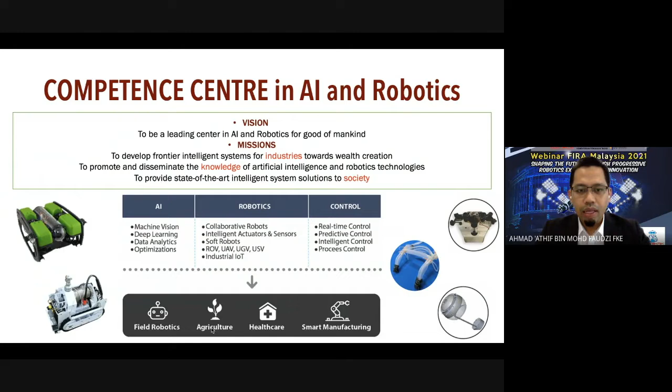My personal research area - we have a few members with different areas - I'm involved in bio-inspired robots, where we develop robots that mimic God-created creatures like ourselves and animals. I'm also involved in field robotics, which covers 3D jobs: dirty, demeaning, and dangerous work. The third area is rehabilitation robotics or biomedical related solutions. The fourth area is biodiversity.

In project areas 1 and 3, we mainly use soft-based actuators or soft robotics, which I will also explain later. This blue box highlights the fundamental aspects, and some of the students involved in masters or PhD are working in this particular area.

To start with, we Malaysians have our goal towards the Shared Prosperity Vision 2030. Within this vision there are 3 main shared prosperity points: equitable growth, sustainability, and inclusiveness. These 3 points are very important to bring Malaysian society towards becoming a high-tech nation.

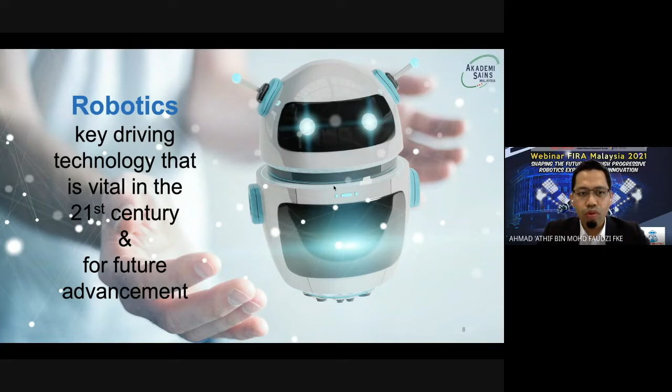So we see that robotics is going to be part of the key driving technology in the 21st century and also in the future of advancement. The IFR, International Federation of Robotics, have divided robotics into two main categories: the first is service robots, and the second is industry robots. Within service robots, there are another two areas: domestic and professional.

And the total of this sales is close to 48 billion USD dollars. So it is going to increase.

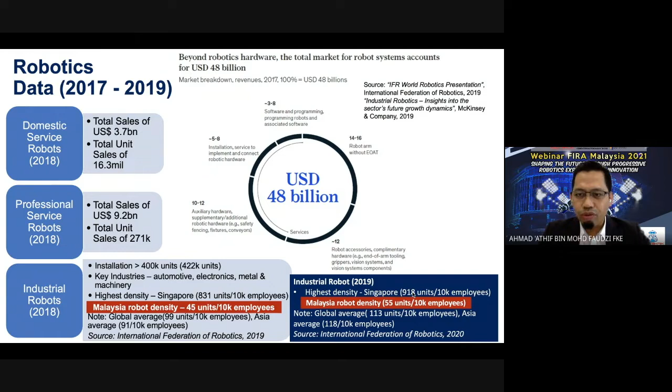However, if you want to look at how Malaysia compares with other countries, the Malaysia robot density is quite lower compared to our neighboring country. We have around 45 units per 10K employees in 2018, and they have around 800. The increment in one year is quite big compared to us. We have increased by 10 units. However, for Singapore, they have increased by nearly 100 units. So we can see also the latest data later on 2021.

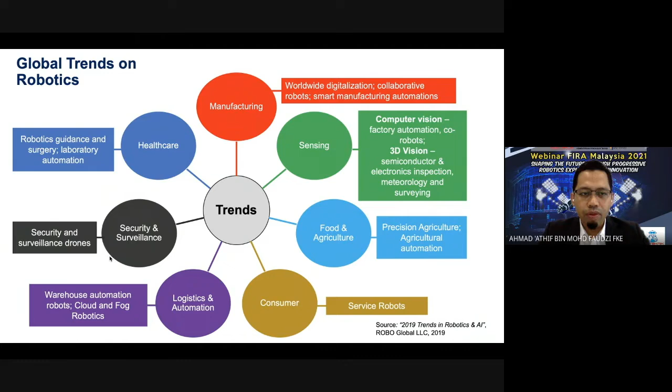So the global trends on robotics, if you want to talk about applied areas, it falls under many categories. We can see healthcare, manufacturing, food agriculture, sensors, mostly in smart manufacturing as well. Security and surveillance, we are doing some of the work here. And we also have robotics in logistics and automation.

We see that most of the advanced countries have their own robotic roadmap, or maybe the country vision. In Malaysia, we are still not having our own roadmap. That's why we're trying to see how the available statistics, especially on the automation readiness index, although we are at rank 14, can help us be at par with other countries, especially to assist startups and also the development of new technology, because robotics is still quite new in Malaysia in terms of how we can come up with our own solution, because normally we take it either from China or maybe use some of the industrial robots from Germany.

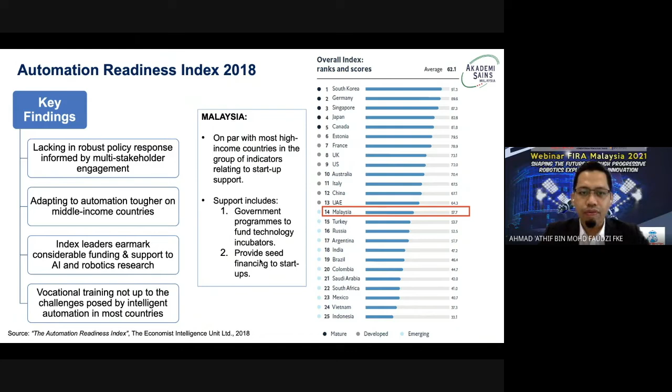So this should include support from government to assist programs, especially for funding some of the technologies. We can see also some of the support that we want in terms of providing assistance at our tertiary level, university, polytechnic, and also to provide seed financing to the startups.

As I have highlighted earlier, in Malaysia we are still yet to have our robotic policy, and that is where the discussion under Academy of Sciences Malaysia, together with some of the robotic experts, comes in to come up with our national robotic roadmap. Actually, we are at the final stage of compiling all the data, and hopefully we can use this data and the policy to assist our talents, especially in the robotics area, to perform towards the progress of our country in this area, robotics.

So we put 6 points under the National Robotic Roadmap, and talent, research and development, commercialization and innovation are among the main parts of the robotic roadmap itself.

So I would like to share some of the contents of the robotics journey in Malaysia. Roughly, we started back in the 1990s, with two universities, UTM and IIUM. UTM started a little bit earlier than IIUM, but roughly in the same year. And we have CAIRO as one of the earliest centers, in 1997. So roughly now we are more than 20 years into providing solutions in AI and robotics. Now we have a lot more solutions and also companies coming in to assist in this area.

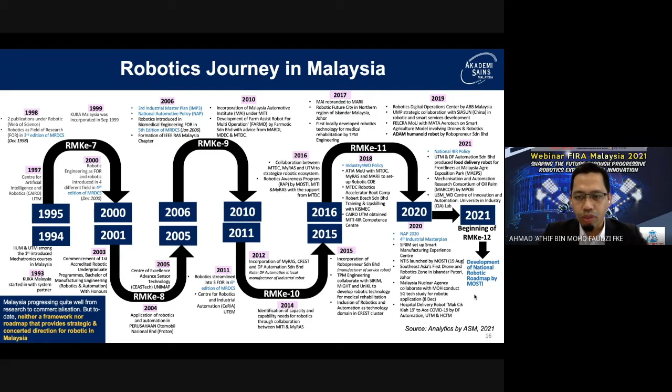Here in 2021, we are working together on the National Robotic Roadmap, mostly at the moment with the assistance of ASM. So for today's session, I will be sharing some of the technology that we have in CAIRO, as well as introducing some of the work that could be useful as part of the awareness in this program.

To start with, we want to highlight again what was mentioned by IFR, International Federation of Robotics, where we have two main categories: industrial robot and service robot. They may have 3 degrees of freedom or more to assist in fabrication, manufacturing, and so on. Whereas in service robot, anything excluding industrial automation is considered a service robot.

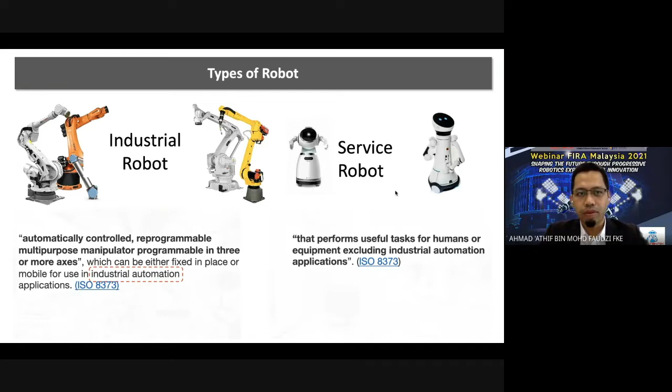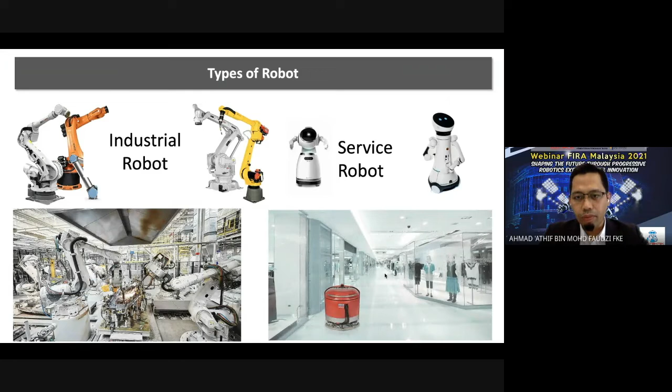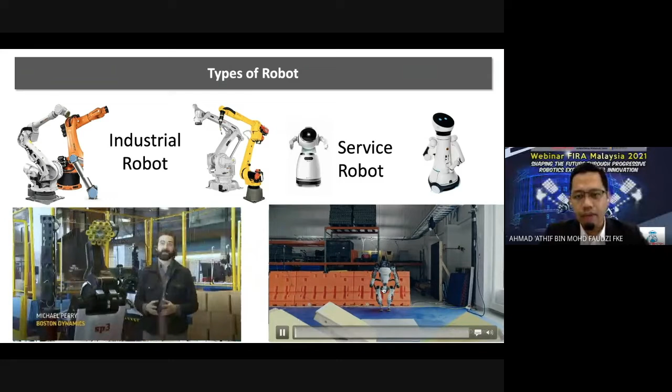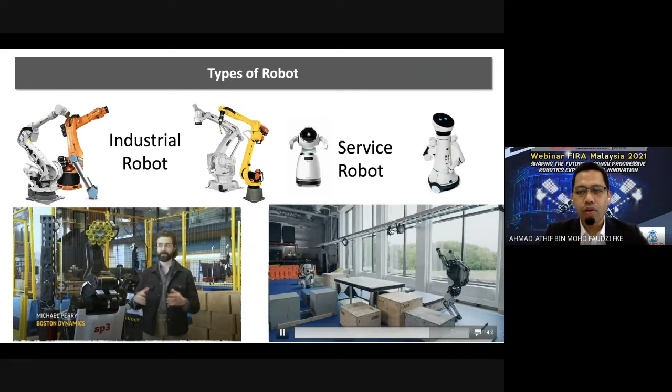And we have this Atlas robot that can move around and also do jumping. I think the most important part for this Atlas robot is the motion, and how it jumps. Here is one of the most interesting parts where the robot itself can do a backflip. Even I cannot do a backflip like this. So this involves a lot of control algorithms and so on.

We can see that initially most roboticists learn how to develop robots inspired by creatures Allah SWT created: animals, humans, leaves, trees. Based on these available structures, we try to imitate and learn how those kinds of movement can be used in some of our applications. So we have snake-like robots for surveillance, and vacuum cleaners using crab motion and so on.

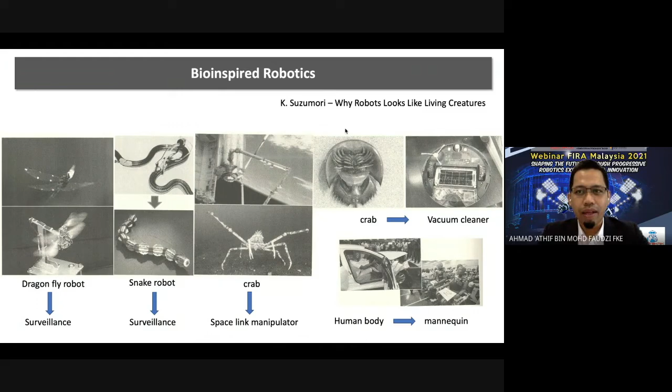Kei Suzumori is my sensei, and he wrote a book on why robots look like living creatures. So eventually, yes, we are learning from living creatures — that was part of the inspiration in robotics.

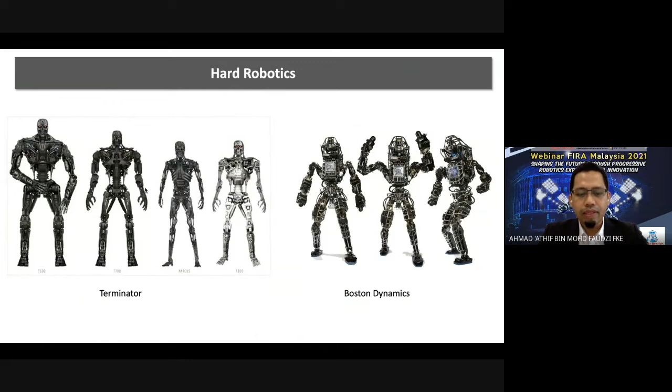And we have the category of hard robotics, which uses metal structures like this. As I've shown you earlier with the Boston Dynamics development, we can see that this hard robot has rigid material, higher precision, and higher speed.

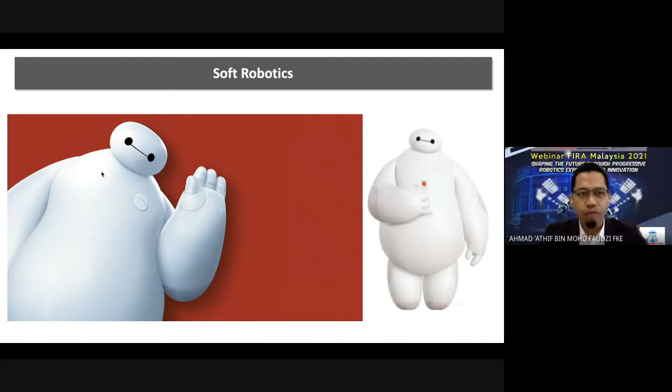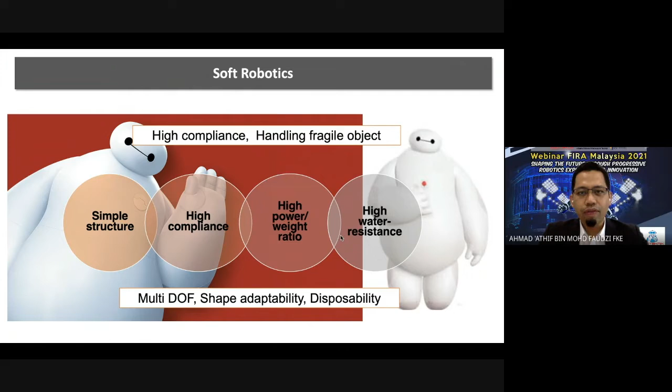Whereas for soft robots — I think most of you may be quite new to soft robots — we have this example of Baymax from the Big Hero 6 movie, and the structure is quite different from the previous hard robot. It's simpler, more compliant with humans, and has higher water resistance. This is part of the advantage of soft robotics, and this kind of technology can also be used in certain areas, for example in healthcare.

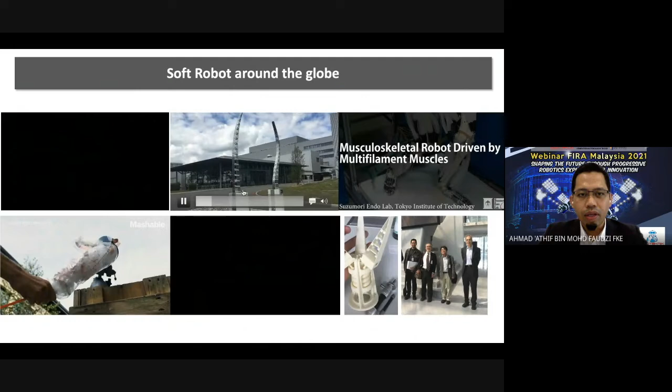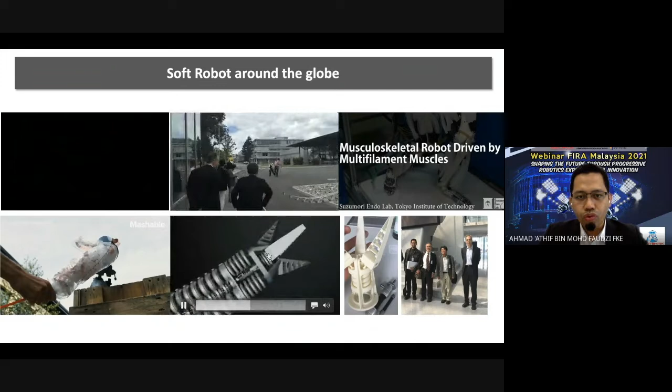I would like to show some examples of soft robots around the globe. One company, Festo, developed this elephant trunk robotic arm, and the technology they use is air-based, pneumatic-based source to do manipulation. The gripper here is the actual gripper.

This is me when I had the experience to visit them in Germany. We could feel the material — they use additive manufacturing. And uniquely, they also use the same method to develop their own gate at Festo.

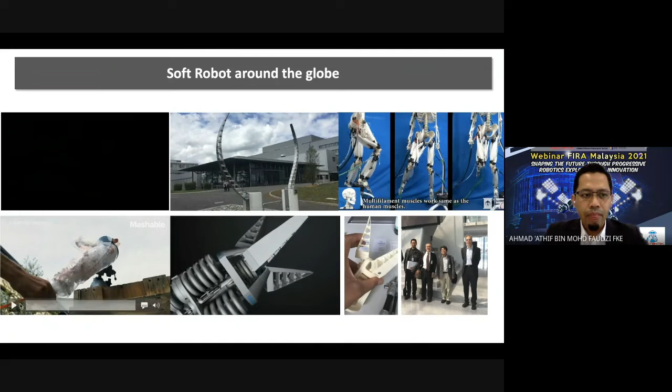Other than Festo, some of our researchers — this is from Japan, my sensei — are developing robots using pneumatic artificial muscles. Some development uses balloon-type actuators, and some others are working with chemicals. So these are examples of soft robots around the globe.

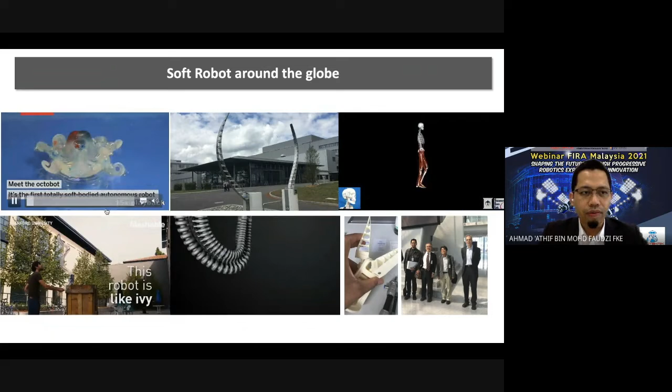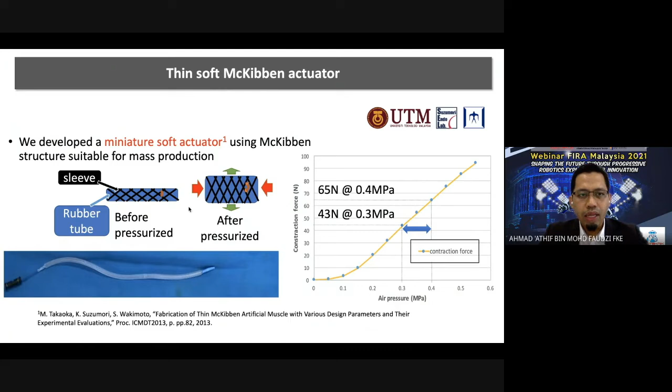One of the things we do in our lab is partly collaborate with a Japanese collaborator from Tokyo Institute of Technology, using this thin McKibben actuator. I will show you some of the work we have — this is a different kind of robot that we develop using the actuator.

We develop a human-like robotic hand. This is another study we use to mimic the robotic neck. And one of the works I did when I was in Japan was on six-legged big robots — I can show you some part of it.

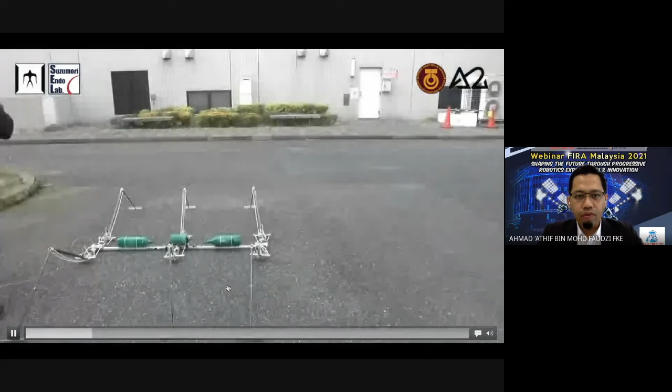So we call this a lightweight and long-legged hexapod Giacometti robot. The compartment has 24 valves on top. It looks like a spider by itself, but it is very, very lightweight.

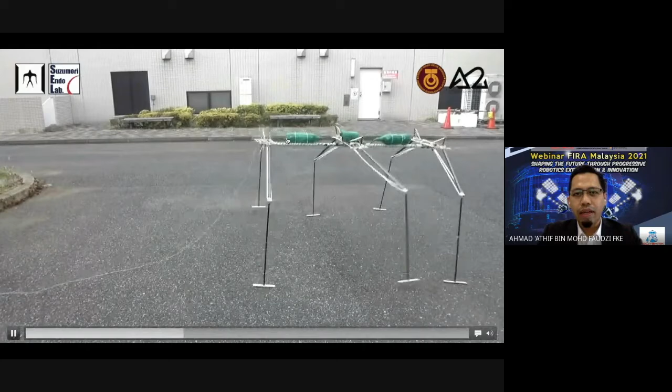And we have these few pneumatic bottles — I think for those who are joining robotics competitions, you have some sources of air coming from bottles. As it is lightweight, it is easier to move from one place to another, and it can be used in different terrain.

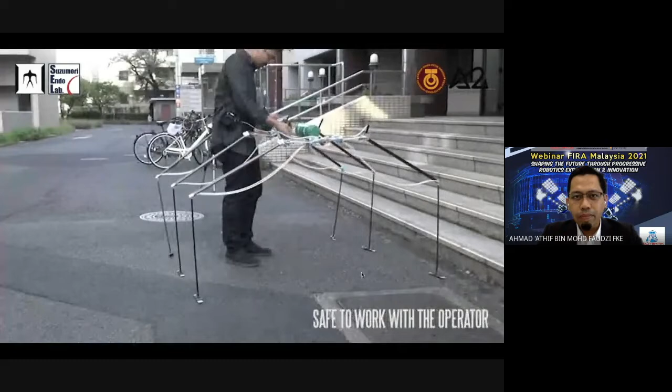Partly, one important point we want to highlight is if we have casualties of robots, the damage will not be as big as with heavy robots. So it's not serious damage, and it can work back to normal with minimum errors or minimum damage — it can still work after minimal recovery.

So this is some of the experience we have with this muscle, and we are trying to work with this soft McKibben material in different applications. Later I will show you.

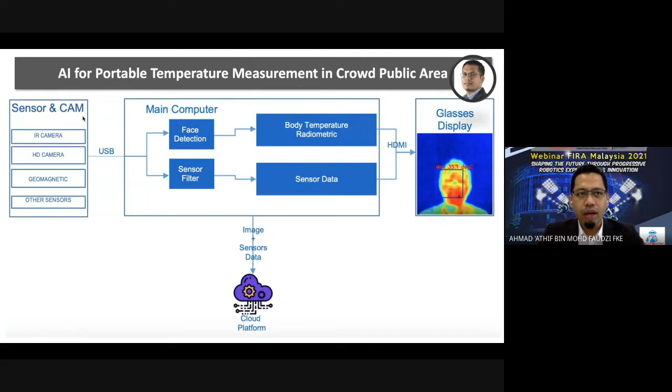The first area of robots we want to highlight is healthcare, where we can use robots to do many things, especially in this COVID environment — how we can use cameras together with artificial intelligence to do detection. This is a work presented by Dr. Ibrahim on movable camera detection, like a pair of glasses that we can wear around.

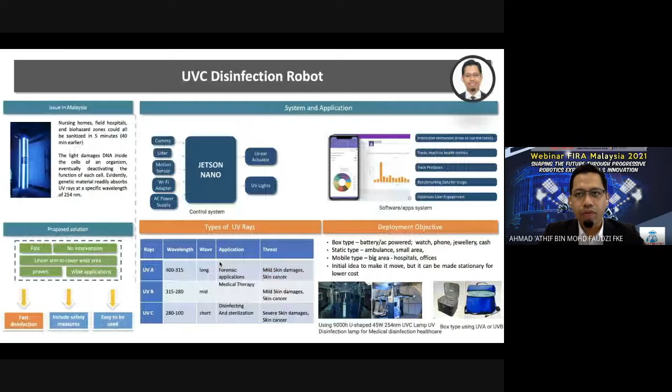Yong developed his mobile-based structure to assist in MAEPS, Serdang, for helping doctors delivering food, communicating with patients, and having less contact with the patient. And we have also UVC-based robots that we have developed earlier.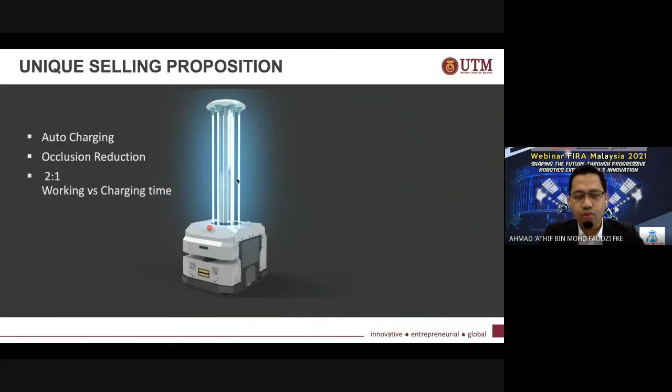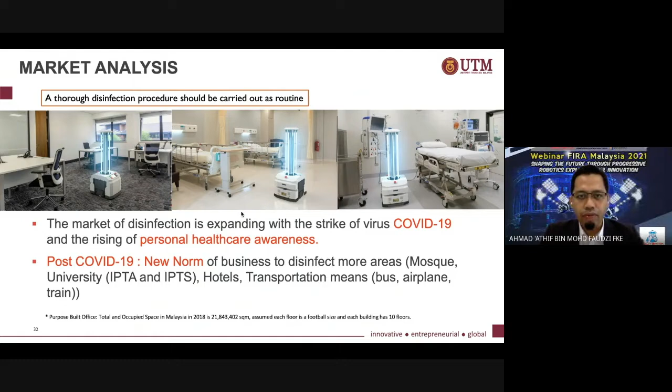This is the first structure, and this is the structure that we are trying to commercialize for a fully autonomous system. Hopefully this robot can be used in clinics, hospitals, offices, mosques, transportation means, and wherever we can use UV as part of the solution to kill some of those viruses. In healthcare as well, we have robots that can be used for rehabilitation.

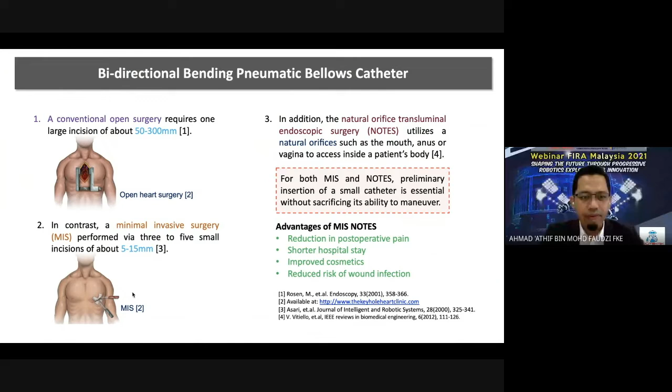We have also used soft robots to assist in minimally invasive surgery. The open surgery will have a bigger cut, whereas minimally invasive surgery will have a smaller cut. So this is where some of these actuators can help in doing some of the manipulation inside.

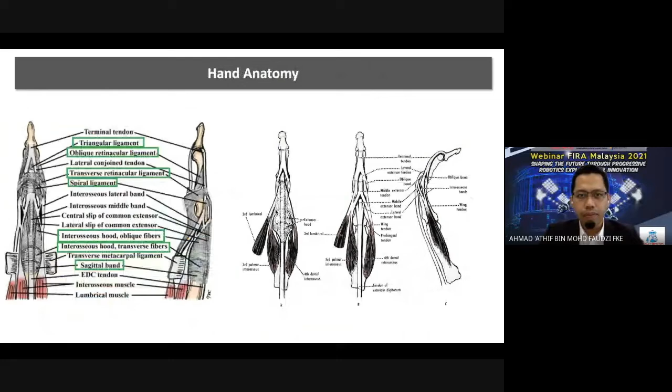Finger musculature robot for helping on pinching motion. We have studied all the anatomy of the hand, and later on we see how we can develop and mimic those hands and study the application of rehabilitation using actuators like this.

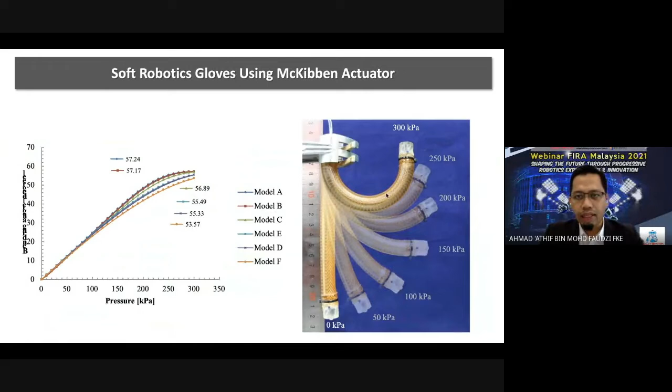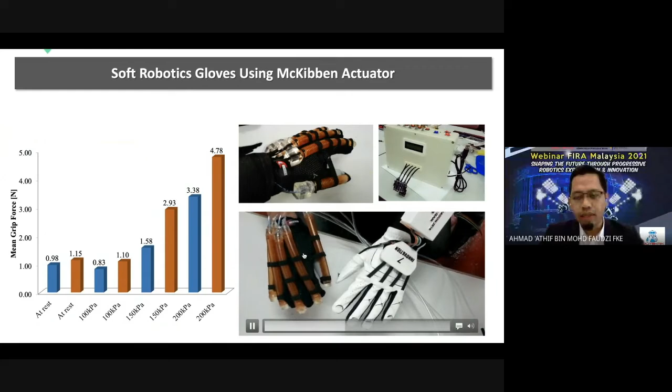With this motion, we call this CPM, continuous passive motion. One arm will be the master and the other arm will be the slave. Using this concept, we can develop autonomous movement. For example, the patient just relaxes and then the actuator will help the patient to move. So this is called CPM.

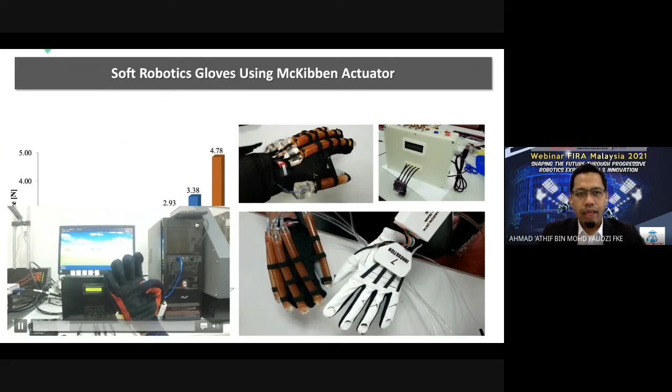In healthcare, this is the new design that we have for assisting the wearing process, so that it is not as difficult as wearing a normal glove. We just use magnetic connectors to quickly attach and detach the material with the hand.

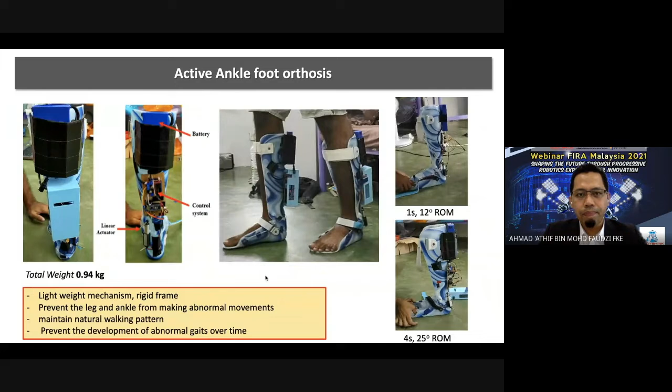So you see in healthcare, there are a few areas that we have involved. Importantly, the robots that we have developed are in collaboration with doctors or practitioners in healthcare, and that is very important because we have to validate our invention with the experts.

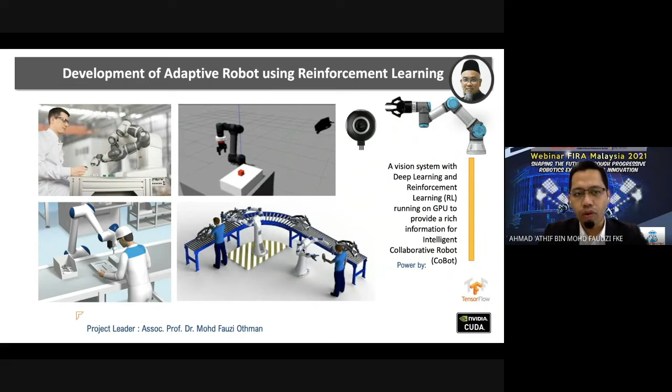And here we have cobot, or collaborative robot, to be used together with humans. All right, by Professor Fauzi.

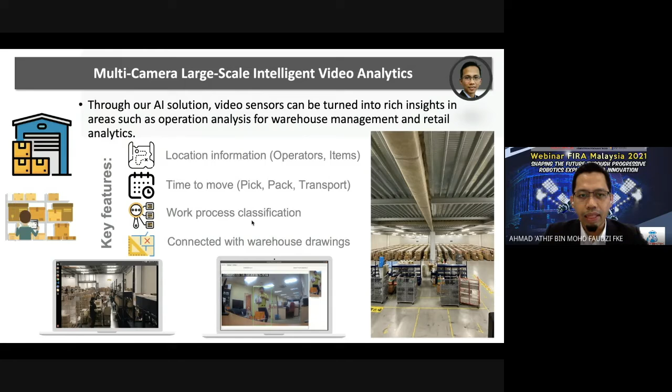This is from Dr. Zul, and the area that he worked on is AI together with warehouse management. AI to do detection of humans, detection of goods, and later on we can predict the time to move, better work process classification, and then overall warehouse management.

For me myself, I have also experience in what we call telepresence, where we work with virtual reality. So the master moves, the movement, and then the robot will be following directly.

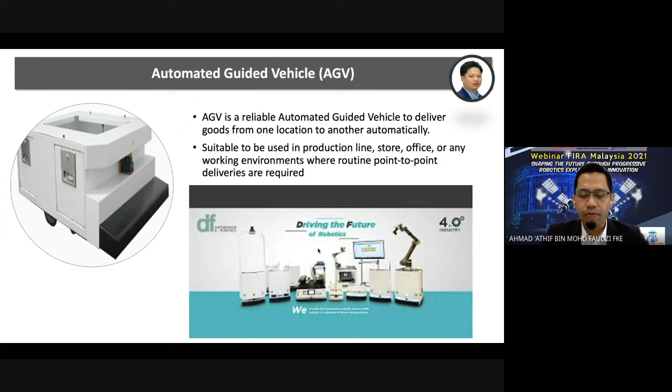In smart manufacturing, I think Dr. Yong is also working hard in his spin-off for different kinds of solutions in the manufacturing world.

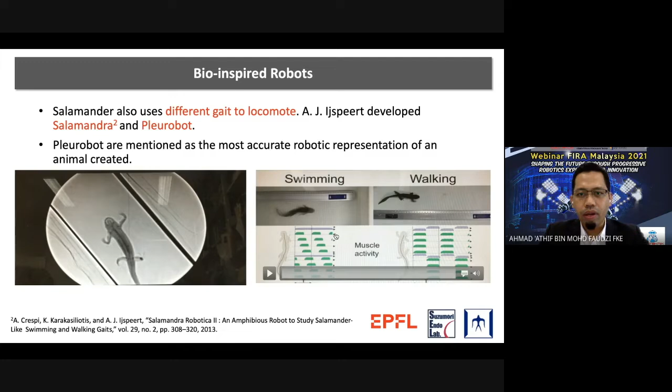Moving forward, so we already covered healthcare, smart manufacturing, and now we go for field robotics. In field robotics, some of the work we do is inspired by lizards, on how the salamander is moving, and we try to develop some of these field robots to be used.

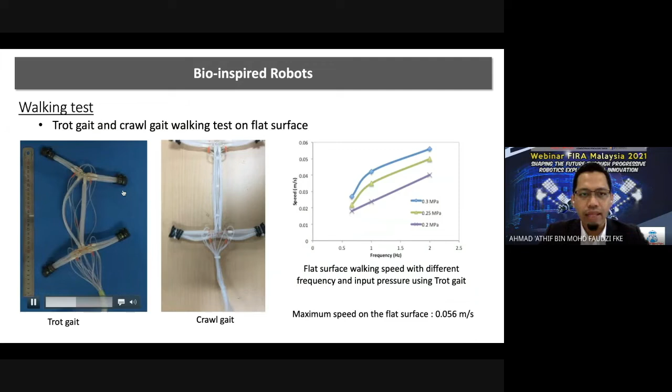To get data, for example. Some of the robots here are developed either on ground or we test them inside water.

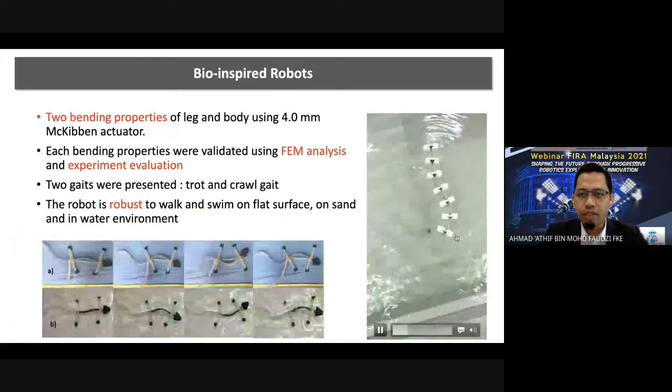We also have another snake-like system, inspired by the sinusoidal movement. Here we can see this is not using a single motor, no motor involved. So we have only soft actuators to come up with this kind of motion.

And maybe the construction will be cheaper, water friendly, and hopefully it can be used later in the actual field data collection. And we have different kinds of materials.

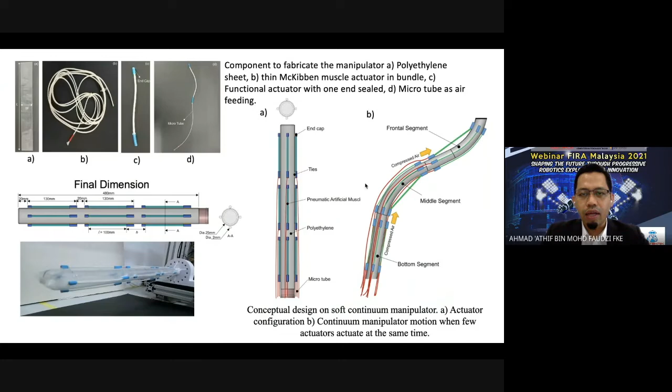This is part of soft actuator where we can use soft actuators to do manipulation like this, with no motor involved. The idea is to have a longer version of actuators that can do search and rescue operations using this soft material. We're also working with different kinds of actuators, combining soft material as well as hard material like this one.

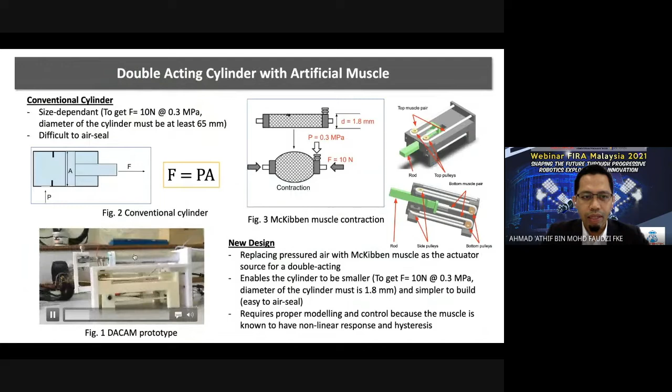So moving forward, in field robots, we have this Inspecto. I think some of our PSAS members have already looked at this and know well about this robot.

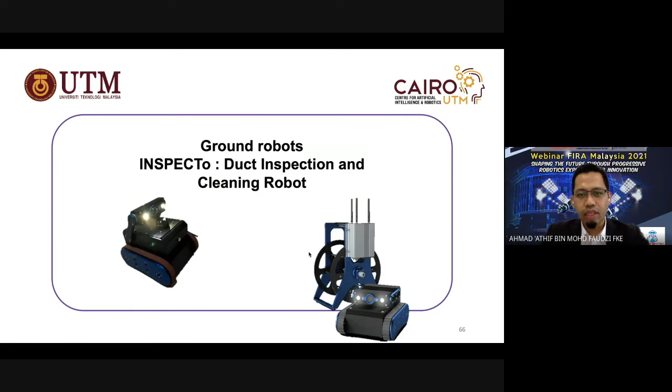So we use this robot to do maintenance in ducting areas. And if the duct maintenance is not done, normally when we come to work we get headaches, respiration problems. We call this sick building syndrome.

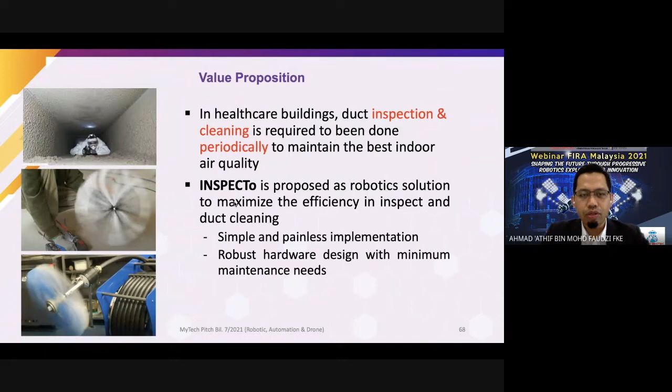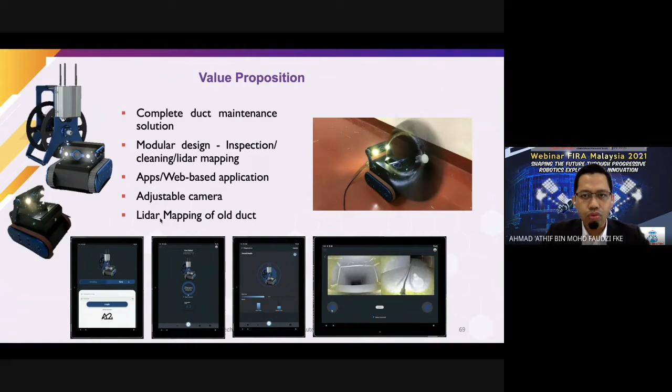The value proposition of this system we are developing is to assist in cleaning as well as inspection. So we came up with this robot that can do both inspection and cleaning, and later on we can have LiDAR to do autonomous mapping as well as autonomous inspection.

So this is how LiDAR works. Normally LiDAR will have the sensor to identify the area, and once we have mapped it, we can then do autonomous movement. We had a good experience last time with PSAS doing some of these experiments.

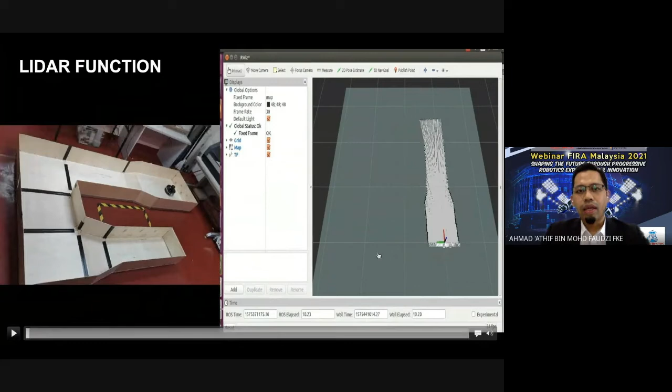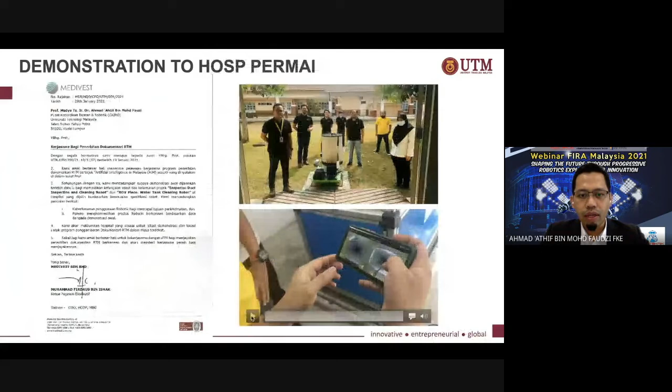For field robots as well, we have to validate. I think the most important thing in field robot work is to validate and talk with the customer. So this is where we come in, do some demos, and also conduct real experiences for the user to feel and touch on how to navigate and so on.

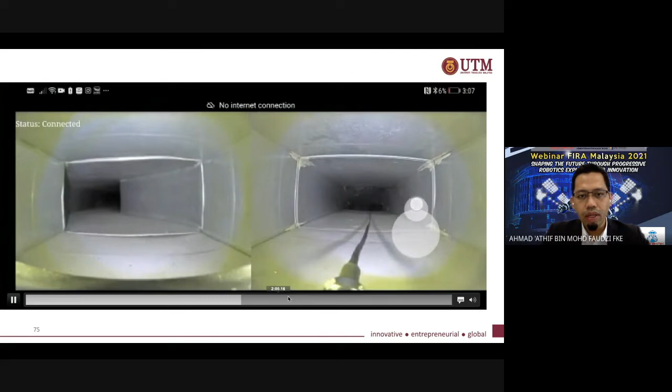This is an example of the actual footage of the inspection process, where we can identify if there are impurities available inside the duct. This one is quite clean; some ducts which are dirty show all the dust available inside.

I'd like to highlight that most of the robots we come out with don't directly arrive at the end stage. We started with a very simple design - you can use a chopping board, you can use acrylic. Later on you improve it, and we validate it against the needs from the industry.

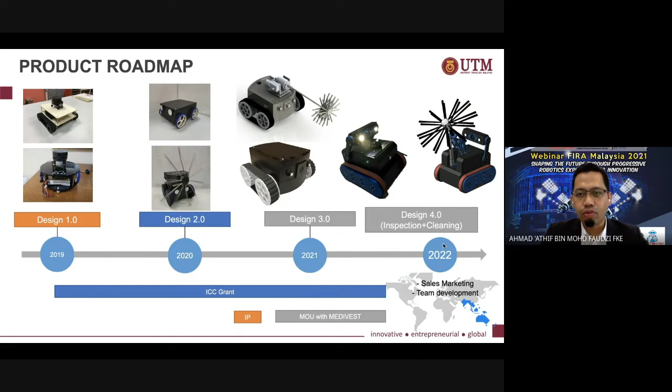It goes the same with the second method of robot that we're developing for underwater. Here the goal is to clean the water utility tank, not by manual cleaning where you have to drain the water, or using a professional diver which has safety risks. So here we can use robots to do it continuously without disrupting the water supply.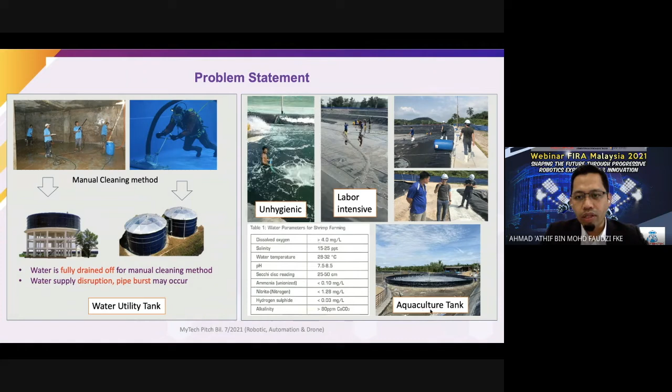The other one is for aquaculture tanks. We have shrimps, aquaculture, and normally the current cleaning method is quite labor intensive - many workers need to come and clean. So how can robotics be used for autonomous cleaning later?

The value proposition we'd like to highlight is safe operation, faster setup, no water disruption, and a cost-effective solution. So here's how robotics comes in, and this is an example of the actual cleaning process - nobody is coming in, it's all robotic based.

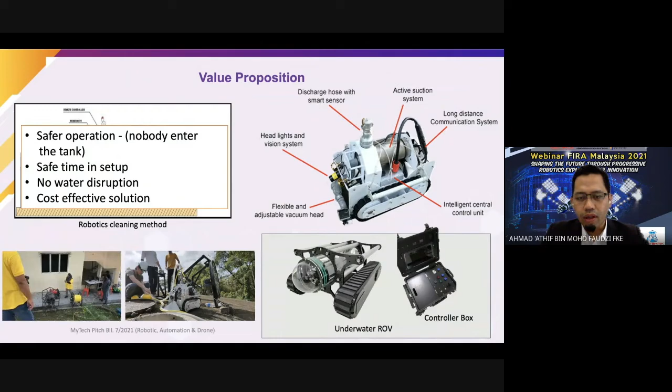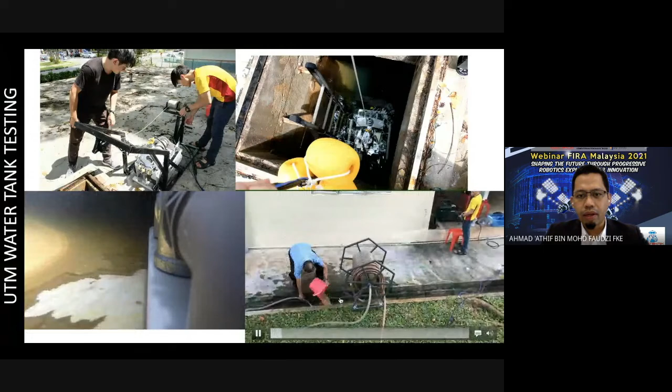This is the latest design that we have for the underwater ROV for inspection as well as cleaning. These are some of the movies to highlight how we do the cleaning process, comparing the water quality before and after, and so on.

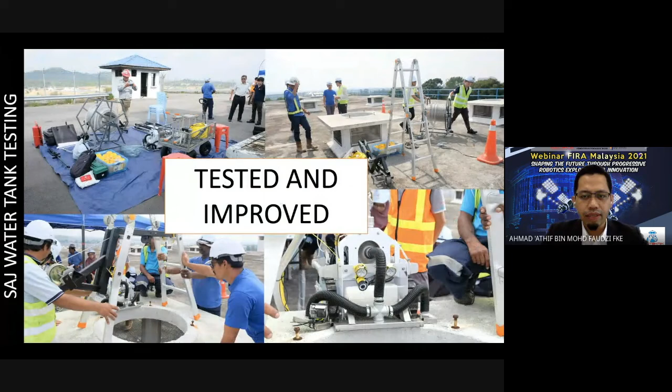We have a lot of tests and validation processes, as I've mentioned, so that we can confirm what the feedback from the customers is.

Again, we are looking at different kinds of solutions - water tank is part of it, water pool in hotels, aquaculture pond - and these are examples of some of the demo sessions that we had earlier.

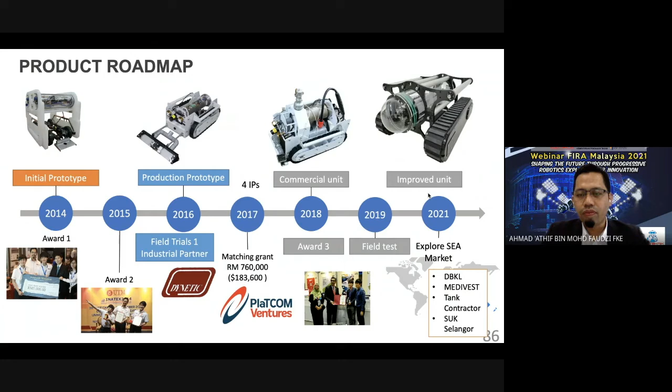The ROV project started much earlier, so you can see how difficult it is developing robots and bringing them to market. Currently we have this unit and are trying to see how it can be commercialized for solutions in water tank cleaning as well as aquaculture cleaning.

Okay, I believe this is the last part of the area that I would like to highlight. We have covered healthcare, smart manufacturing, as well as field robotics and agriculture.

So in Cairo, we have some work on exoskeletons. We have calf monitoring using sensoring technology, and also, most importantly, in agriculture we can deploy AI together with robotics, and with AI we can do object tracking.

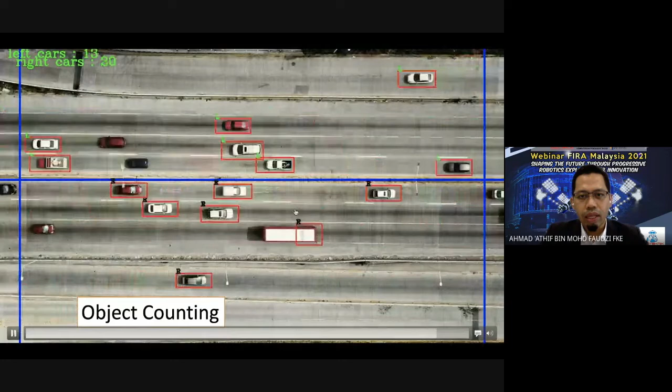We can also do object counting. For example, having a camera to analyze how many cars are moving from left to right and how many vehicles are moving right to left. This is important when we integrate with AI, identifying different kinds of vehicles, trucks, cars, and so on.

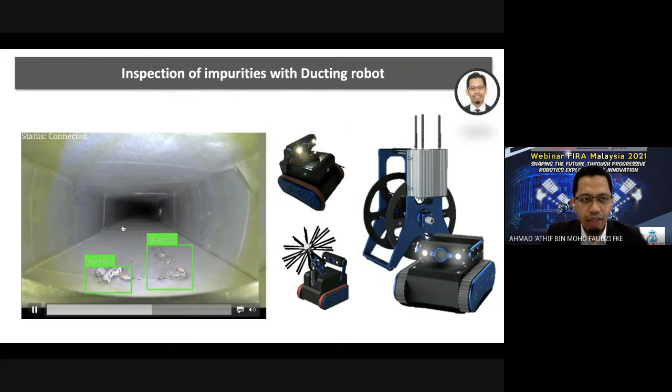Another technology we can propose is our ducting robot. If we have some impurities inside the duct, we can identify that these are something which is not properly available, so you have to do reporting, and AI can help.

We have worked with WWF and the Department of Fisheries, using AI to do detection for turtles, and here we use an underwater robot to do observation. Not only turtles, we have a lot of endangered species that we can assist using AI.

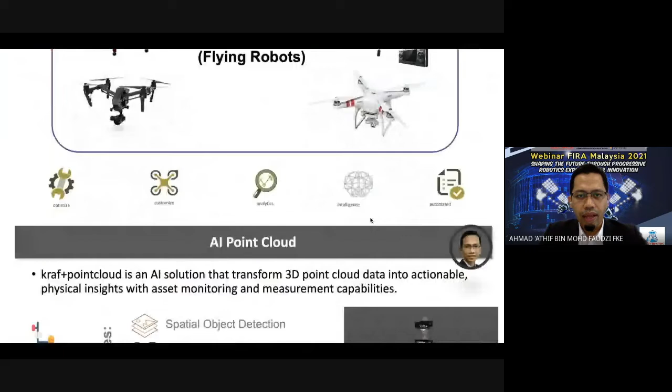Coming back to the area of agriculture, this is where we have drones, flying robots that can be used. By using AI technology together with drones, we can do livestock counting.

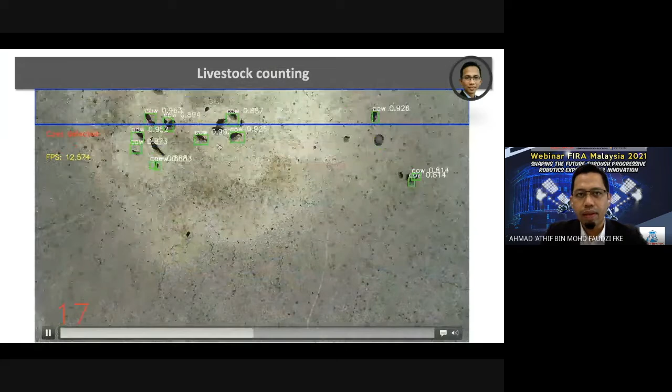So counting how many cows are available, we can count goats and so on. We can use this for vegetables, understanding how many bananas have been wrapped, how many are not wrapped and so on, and some studies on plant diseases, maybe for paddy as well.

Here we can also use AI with drones to do asset monitoring. This is the work by Dr. Zul, looking at fences that are still functioning and those which are not. It's quite tedious to walk around like this, so by using drones we can speed up the process.

Okay, last but not least, before I go, I think the time is quite limited. We have this program of upskilling and reskilling under Industry4WRD, where in CAIRO we are trying to highlight these Industry 4.0 pillars, working together in three main areas.

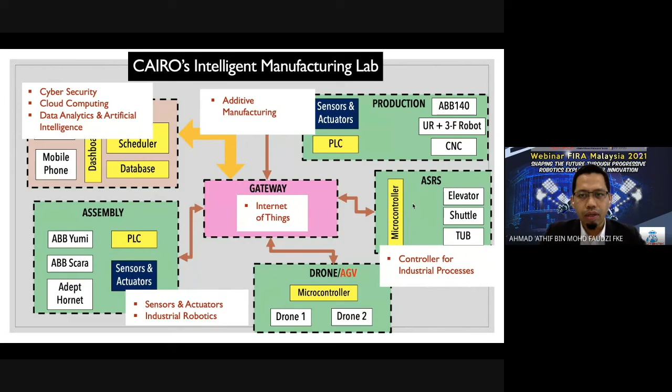This is where the CAIRO Intelligent Manufacturing Lab, as I mentioned earlier in the slide, assists with the available technology, the smart manufacturing line, using different kinds of robots put together in four modules: the production module, assembly module, drone delivery module, and the storing and retrieval module.

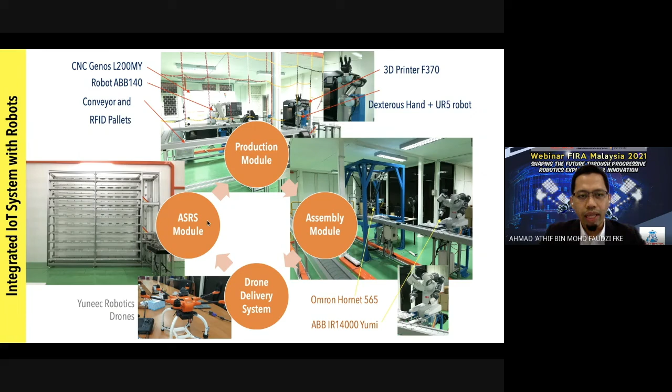This is where drones are also used to carry goods, to transport from one compartment or module to another. This is quite interesting—you can see everything inside the lab is based on robotics motion.

We have the production line using CNC machines, and we also have 3D printers to do additive manufacturing. Everything is controlled by a robotic arm. This is the fabrication line, this is the assembly line to assemble some of the parts, and drones fly over to bring the compartment to this station.

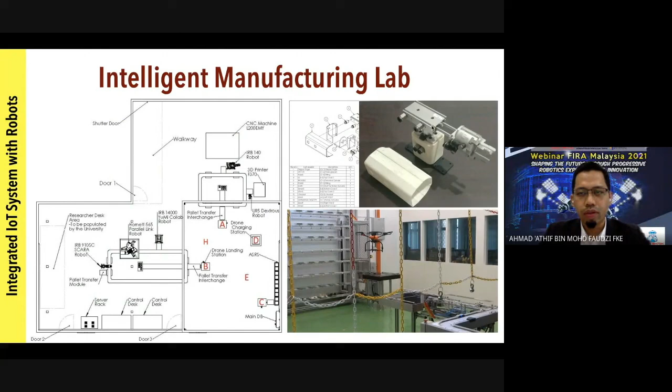This is the robot that we are going to develop, a 3 degree of freedom robot, to be manufactured in this line.

Before we go, I would like to highlight this saying by James Lovell: there are people who make things happen, there are people who watch things happen, and there are people who wonder what happened. To be successful, we need to be the person who makes things happen, and together we can succeed, for the betterment.